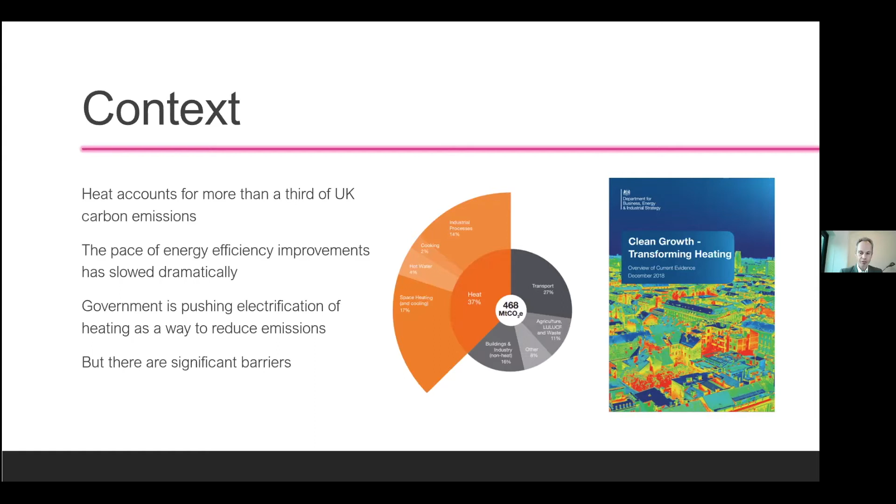The second one is the cost, and the cost one bites twice. Firstly, because capital costs of switching over to electric heating are high, significantly higher in most cases than simply buying a new gas boiler. And secondly, because the running costs of electric heating are quite significantly higher than they are for gas. And per unit, you would reckon we're paying 3 or 4 times more per unit of electricity than we currently do for gas.

Just to bring home this point about the pace of change slowing over recent years and the rate of energy efficiency improvements becoming delayed recently, this chart shows all homes across the UK divided into the EPC bands from A to G. And while we have been successful in moving a small number of millions of homes from E up to D, and D to C, so significant improvement for those homes, we are still, after 40 or 50 years of work trying to improve energy efficiency of homes, left with the residual 70% of homes that are still EPC level D or below.

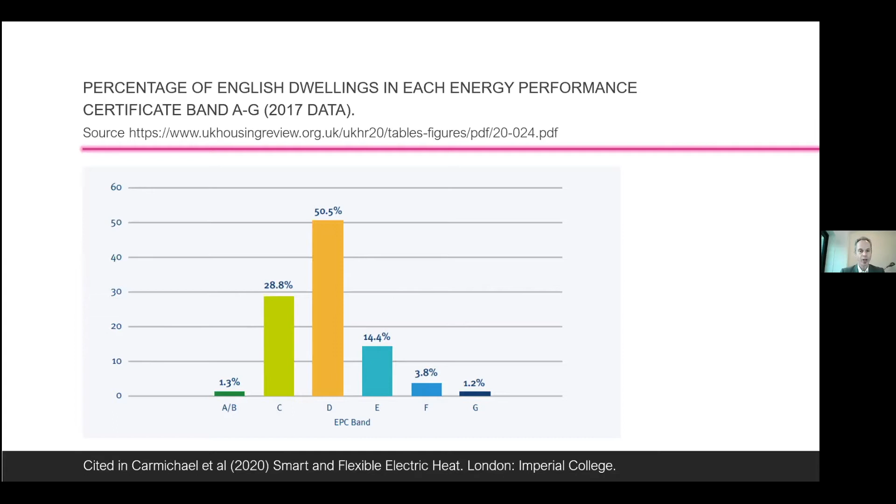And these homes are sticky. They're hard to move between these EPC bands. And this is significant when it comes to electric heating, and particularly heat pumps, because the conventional wisdom is that you need to have an energy efficient envelope to start with before you go ahead and install electric heating. And ideally, you need an EPC band A or B, which is to say a house that has insulated floor, walls, loft, and high performance windows before you invest in a heat pump.

How do we fit into all this? Well, we won a competitive tender exercise that BEIS ran at the beginning of this year to develop a full dynamic simulation of UK homes that would tell the government how they can implement electric heating at lowest cost. So how they can overcome that significant barrier to electric heating, which is the fact that the costs are so high. I'm giving a sneak preview of this work now, and we're due to complete the work in February next year.

I'm going to talk you through stage by stage a simplified chronology of the work that we've carried out so far, starting out with house types or archetypes that we developed to represent all homes in the UK. And we did this in 2 stages. First of all, we looked very hard at form factors. That's to say the ratio of wall areas to floor areas, wall areas to window areas, and the footprints of individual homes. And we tried to divide all homes up into a limited number of forms. And these forms are relatively immutable. It would be difficult to change the forms of homes.

I would contrast this with aspects of homes where the performance can be changed, like installing additional insulation or changing the windows. So after we divided into a relatively small number of homes based on form factors, we came up with 6 form factors, which were sufficiently generic to cover the stock. We then looked in more detail at the construction types, and particularly the floor construction, whether they had solid or suspended timber floors, which make quite a big difference to thermal performance. And we looked at the walls and the contrast between cavity walls and solid walls. Cavity walls are relatively easy to insulate. In most cases, they have already been insulated, whereas solid walls in most cases have no insulation and are more expensive and more difficult to treat.

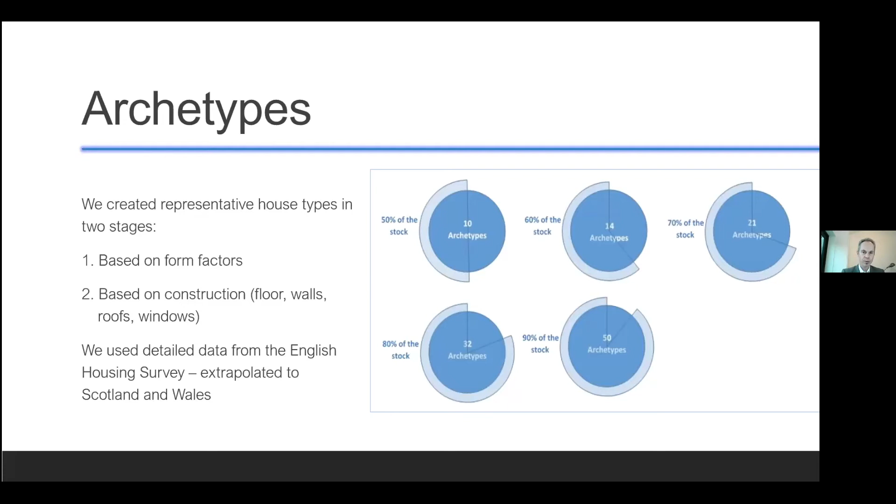And we did all this using the English Housing Survey data, which is pretty much the best description we have currently of English and UK homes. And what came out of that process were these 12 archetypes that describe collectively 82% of the stock. You can see the archetypes for yourselves, starting with flats. We have 4 types of flats, bungalows, terraces, moving on to detached homes. And you can see the TFA column there, column 4 in this table, shows you how the floor areas vary between these archetypes. So they are contrasting types.

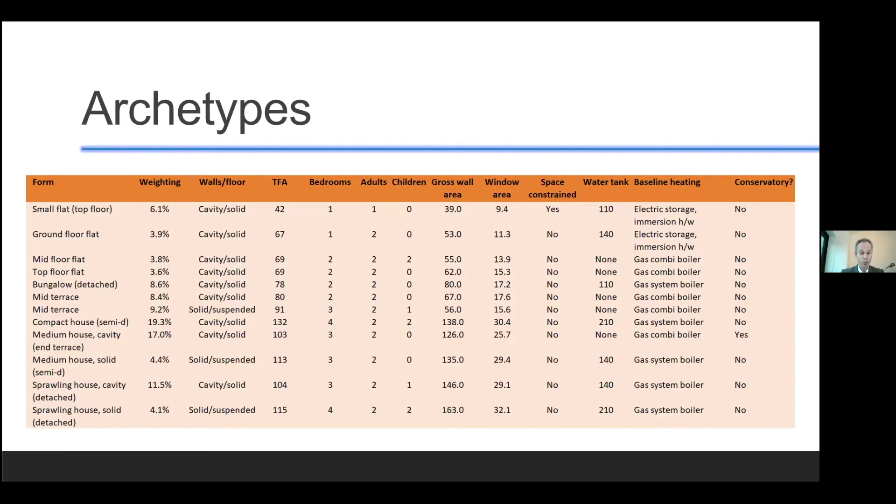Okay, regarding the modelling, I don't have time to describe the models in enormous detail now, but I will pull out a few key features. In each case, we devised a floor plan for those 12 archetypes, and all 12 were modelled initially with a base case heating system, which was either a system boiler with a hot water tank, a combi boiler, or storage heaters. We went on to model 7 alternative heating systems, and these 7 heating systems could be put together with each of the 12 archetypes.

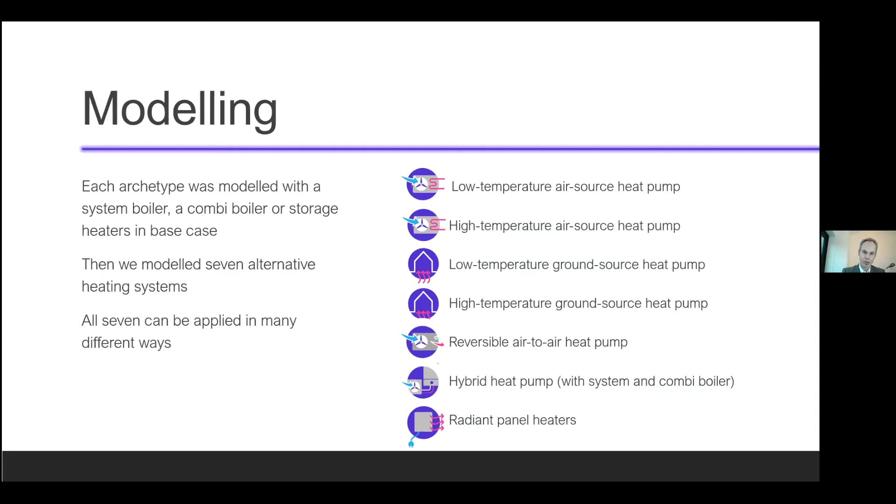And the 7 heating systems we modelled, these are all electric, all upgraded heating systems, are low and high temperature air source heat pumps, low and high temperature ground source heat pumps, reversible air-to-air heat pumps, a little bit like the air conditioning systems you see in some hotels, a hybrid heat pump, which is where an air source heat pump is linked with an existing gas boiler and both are used in tandem, and finally radiant electric panels. So all of these heating systems were linked up with the house type archetypes.

And on top of that, another layer of permutations was whether these heating systems were used with or without time of use electricity tariffs. Now, time of use electricity tariffs are where you pay a variable rate depending on what time of day you're using electricity. So in peak demand periods, typically between 4 and 7 p.m., you would expect to pay 2 or maybe 3 times more per kilowatt hour of electricity, whereas in off-peak periods, overnight, when there's low demand for electricity across the grid, you would pay significantly less.

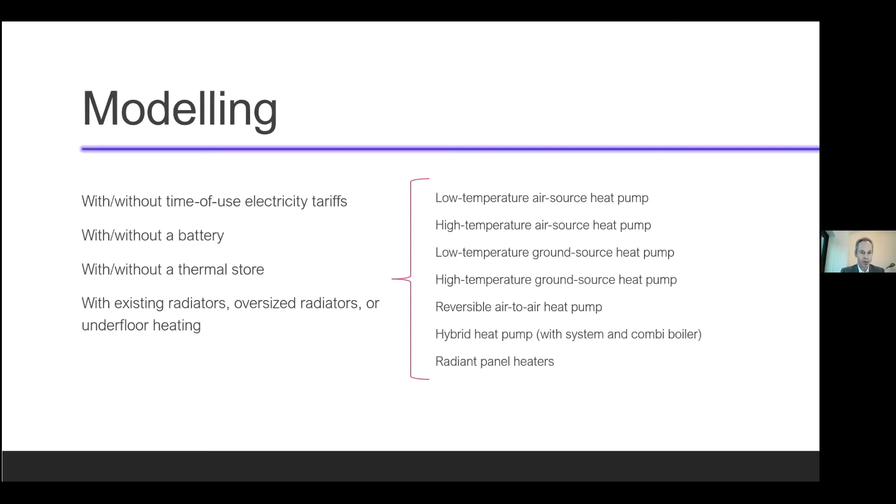There's a big contrast between that and the arrangement we have currently for most homes, which is you pay a flat rate, the same rate per unit of electricity, regardless of when you're using the power. We also modelled all of these heating systems with or without batteries, thermal stores, and oversized radiators or underfloor heating. And the oversized radiators and underfloor heating are important for electric heating and heat pumps because oversized radiators or larger heat emitting areas in tandem with insulation allow lower flow temperatures to be used in the heat pumps. And lower flow temperature for a heat pump means greater efficiency, improved coefficient of performance.

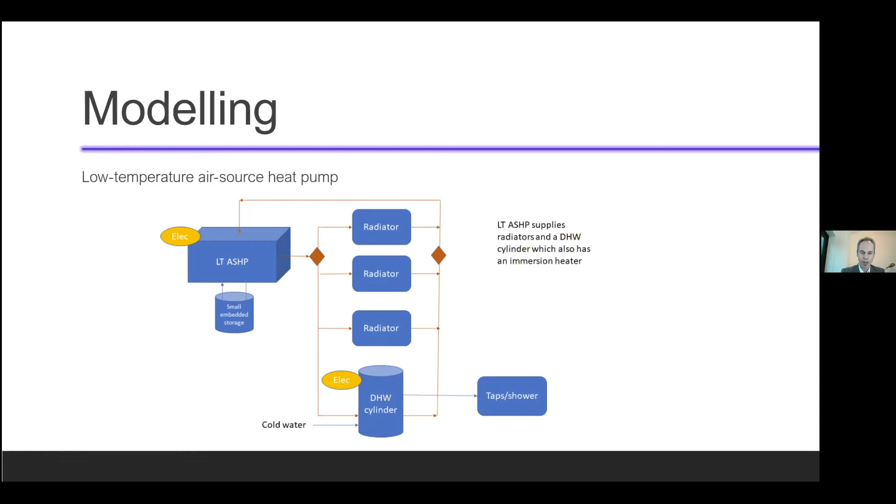So what we did in the models was to implement a Legionella cycle whereby water is heated to 60 degrees for a 2-hour period every weekend. It's an off-peak period, and that reduces the risk or eliminates the risk of Legionella disease in heat pumps.

As well as the heating systems, we also implemented in models a whole series of fabric measures. There were some low-cost measures like airtightness or top-up loft insulation, where you add on a little bit more loft insulation than is installed initially. And there are expensive measures like triple glazing or floor insulation. And all these things are linked in complex ways geometrically. So if you can imagine a multi-dimensional matrix, there are lots and lots of different permutations of measures, tariffs, and configurations for each archetype. And in fact, we worked out that there are between 12,000 and 100,000 different combinations of measures that could be applied for each of those 12 archetypes.

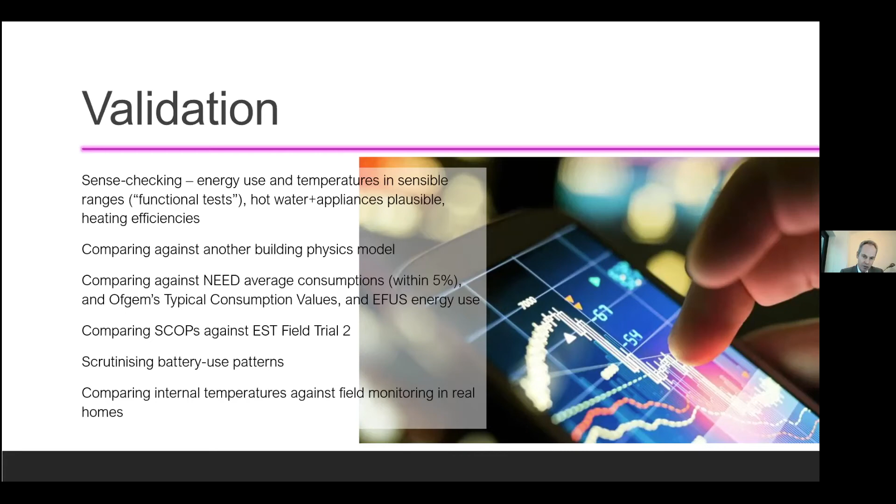The next stage in the analysis was to validate our model. A model that hasn't been validated is of little value. And we did a number of steps in model validation. We compared against a commercial piece of modelling software called IES, very widely used in the UK for dynamic simulations. And that gave a pretty consistent estimate between energy consumptions and internal temperatures to our models. And we also looked hard at coefficients of performance. And these coefficients of performance are a critical measure for heat pumps, a really important measure of how many units of thermal energy heating you get out for every unit of electricity that goes into a heat pump. This is a really important concern, which we sought to validate for all of the heat pump systems.

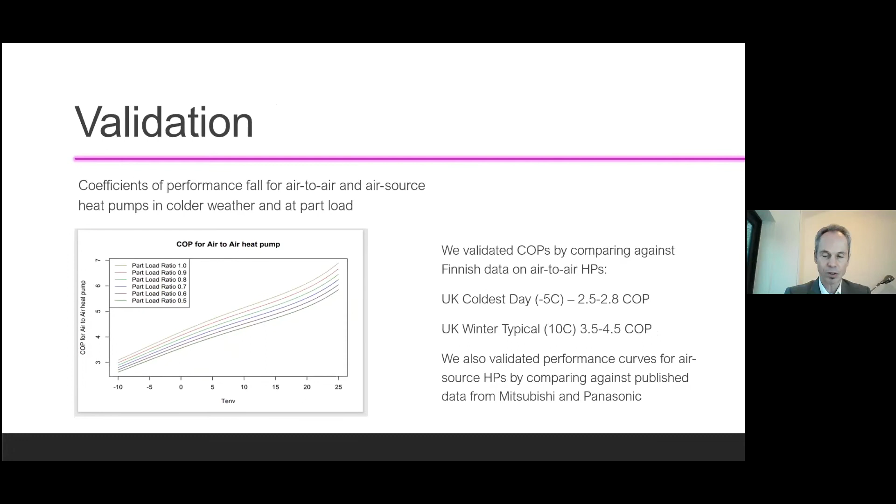We struggled, though, when it came to air-to-air heat pumps because they are very seldom used in housing in the UK. So we looked at Finland and we found good data on Finnish air-to-air heat pumps, and we compared the coefficients of performance we were getting from our model with those from the Finnish data. And again, we found consistent curves. We did similar things using data from Mitsubishi and Panasonic for the more common forms of heat pumps.

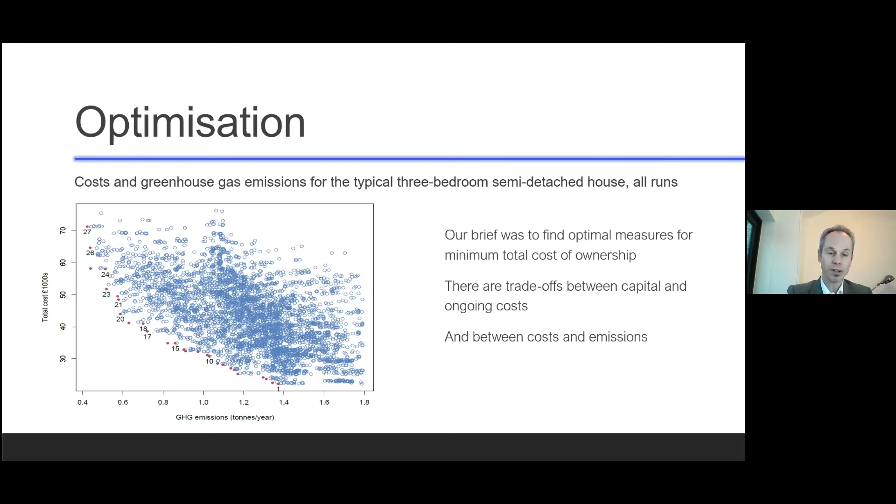Okay, returning to the house types and hopefully the choice of archetype that you've made yourselves, I'm going to explain how the optimization process resulted in packages of measures and particularly heating systems for each of the 12 archetypes. The first two flats, these are the flats that started out with electric storage heaters as heating systems, continued with storage heaters as the most cost-effective way of switching over to electric heating. The difference is, though, they're not traditional old-style storage heaters. These are new high heat retention storage heaters, which include fans and much better control than we experienced in the past.

The next four house types, so that's the other two flats, the medium semi-detached with solid walls, and the sprawling detached home, also with solid walls, were upgraded with air-to-air heat pumps, while all of the rest had air source heat pumps. Now, in all cases, there were other fabric measures adopted alongside the heating systems, and I'm going to say a bit more about those in just a moment.

As to cost, this is perhaps one of the more frightening aspects of the work, that the cost of upgrading in these ways, so both the heating systems and fabric measures, including all energy and maintenance costs over a 15-year period, which is the time frame we were asked to look at by BEIS, ranged between £9,000 at the low end for a small flat, up to nearly £27,000 for the sprawling detached home with solid walls.

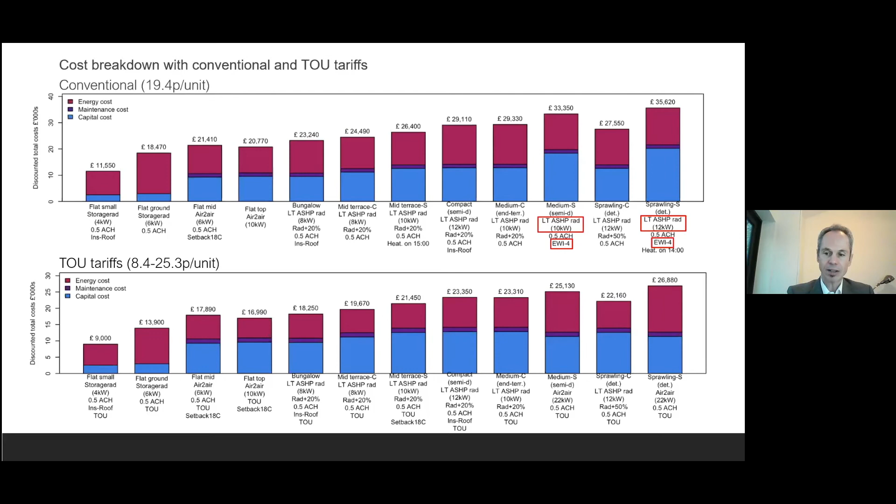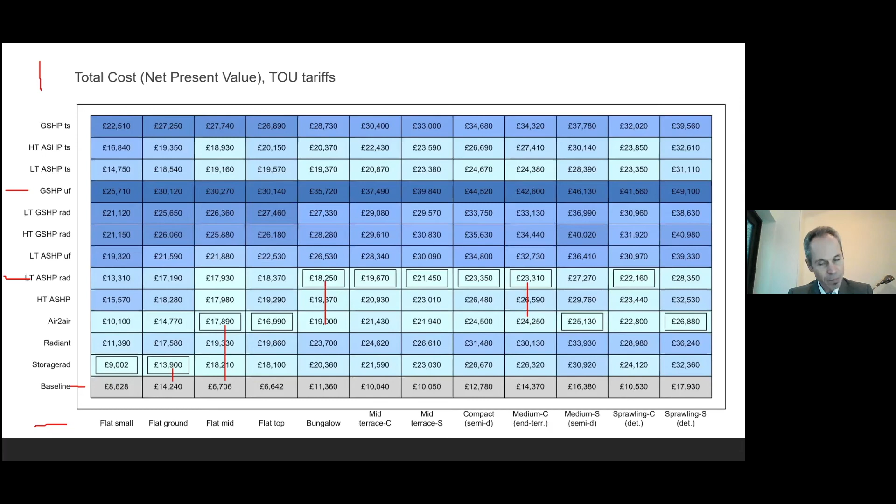And the other point I'd like to make here is that actually, on quite a number of occasions, the difference in cost from the first to second or third most cost-effective measures is very small. So, for example, for the bungalow, it's a difference of less than £1,000 between the first choice and the third choice. For the medium end of terrace with cavity walls, you can see again a very small difference, less than £1,000 between the first and the third choice. So there are some baskets of measures that actually don't have significantly different costs.

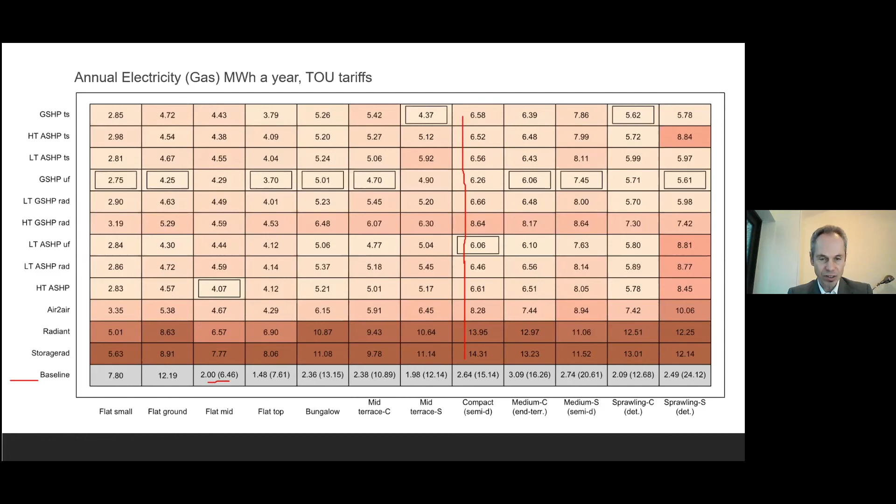How does this flow through into energy consumption? And again, you can see perhaps your own baseline energy use here. For example, the mid-floor flat is 2,000 kilowatt hours a year of electricity, a bit over 6,000 kilowatt hours a year of gas. And in all cases, all electric heating systems result in less energy use overall, but many of them, quite predictably, are shifting gas to electricity. And the other important point is that from highest to lowest, there is typically a doubling of energy consumption, depending on which basket of cost-effective measures is chosen.

Now, as well as the annual energy consumption figures, because we're doing these high-resolution runs at 10-minute intervals, we also know quite a lot about very detailed energy scenarios. And this was an example that BEIS asked us to look at the potential for flexibility for shifting power demand from one period to another with a whole series of different technologies.

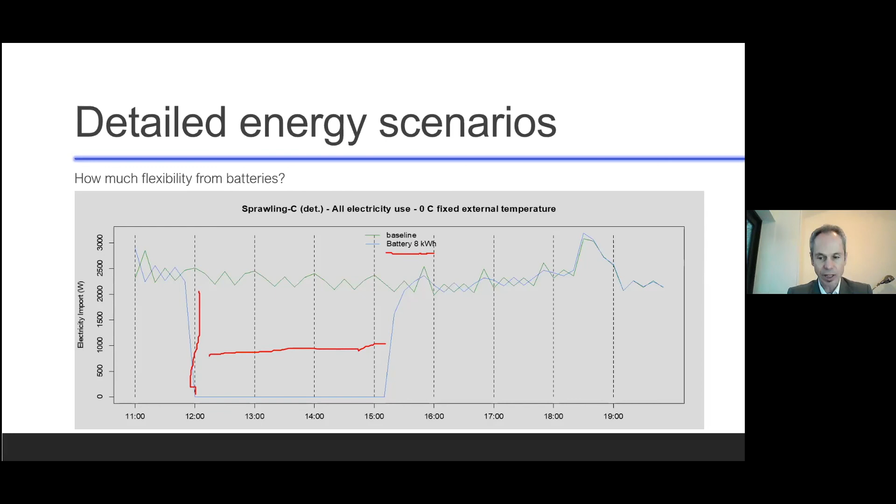This one looks at batteries, and this high resolution data allows us to work out, this is a simple example, that if you have an 8 kilowatt-hour battery in a sprawling detached home with cavity walls, you can anticipate savings of about 2,500 watts for a duration of a bit over 3 hours. This is a really useful piece of information when it comes to thinking about future flexibility we might be able to achieve

by using electric heating. Now, from a climate change perspective, greenhouse gas emissions are the most important output. And the good news here is that emissions for almost every one of these new cases of electric heating are lower than the original emissions. And in many cases, they are less than half of the original emissions. You can see that the

most efficient, or the lowest greenhouse gas emissions tend to come from the ground source heat pump options, which are sadly the most expensive ones, and there's a trade-off here. But remember, on this chart, we haven't optimized for emissions. We have been optimizing on each occasion for cost rather than emissions, and we're intending to do this in the future.

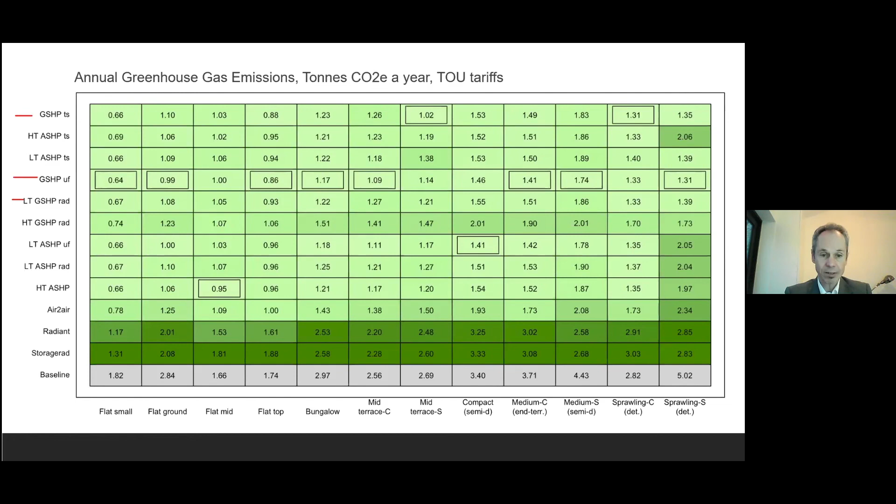Okay, I'm going to try to draw things together and draw out some conclusions now. The first point to make is that this prevailing wisdom of the way we should incorporate electric heating in homes is quite different from what we've found. And we think existing homes can be converted to electric heating at much lower costs than the accepted wisdom. So rather than spending maybe 70, maybe £100,000 per home, we can bring those costs down to only 10 or 15,000 pounds capex per home.

The next point is that most of the fabric measures that are normally recommended for use with heat pumps aren't justified on purely economic grounds. There might be other good reasons for insulating, for the more expensive measures, to do with comfort or maybe humidity and condensation. Those other issues, but they wouldn't be justified on purely financial grounds.

But the tricky thing here is that the trade-offs there are between higher capex, lower running costs, and the optimum carbon emissions per pound spent differ in very complicated ways that are difficult to foresee without looking in real detail at the individual home, and would be very difficult to understand without a model like this code model we've developed.

If we try to scale up the work that we've done to consider the impact across the whole of the UK building stock, it would cost around £320 billion to switch all homes over to electric heating. And given that we have 30 years, that means spending £11 billion a year. That's a huge sum of money, clearly. And to try to put that into some kind of context, we're currently spending in the UK about £3 billion a year on refurbishment and maintenance. So in order to switch to electric heating, we need to factor that up by about 3.5 times, which is a stretch. But if government is able to put up some of that money, that is still possible.